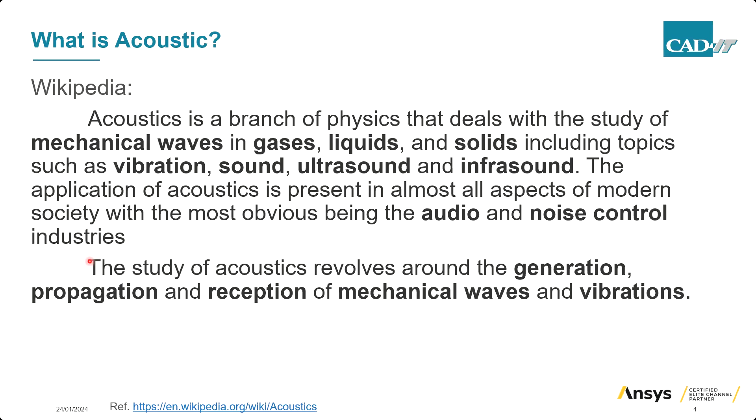Then if you take a look at sound itself, sound is the pressure disturbance that human ears can hear. We know that sound propagation is called acoustic, as we mentioned earlier. In this case, the sound wave will travel from the speaker to our ears.

The sound wave in this case is what we call a longitudinal wave. How does it propagate? If it is in solid, it's molecular vibration. But if it is in fluid mediums, it's because molecules exchange momentum, meaning they move ahead together.

In the propagation of the sound wave, momentum exchanges between fluid molecules, and this variation is known as pressure. It means that if we know pressure variation or deviation, then we know how sound travels from place to place, I would say that way.

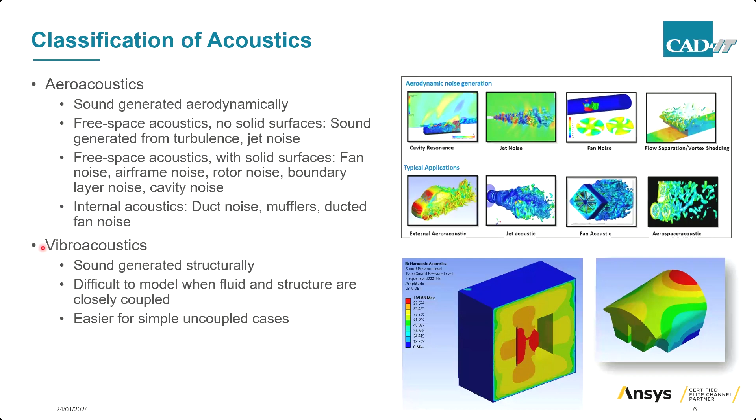Let's move on to sound pressure, or sound. The sound pressure is the local pressure that deviates from the ambient, atmospheric pressure, caused by sound wave. This means that when the sound wave propagates, it makes the pressure deviate. As I mentioned, momentum has been exchanged between molecules, and in this case we can use CFD simulation to solve the wave equation.

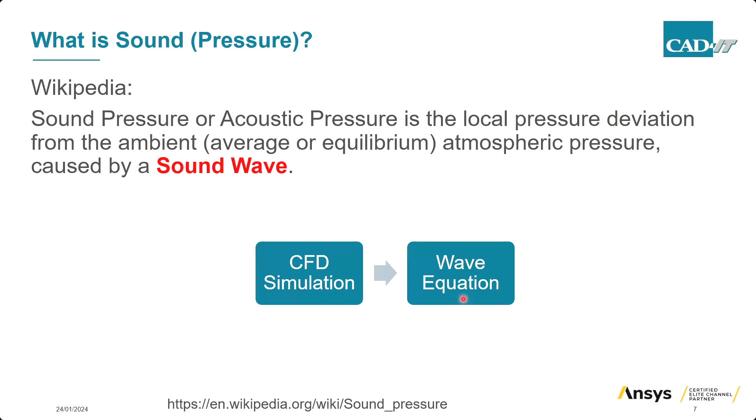Let's talk about CFD a bit, so you understand what it is. Because of aeroacoustics, we have what we call Computational Aeroacoustics, or CAA method, inside our solver as well. This method solves the Navier-Stokes equation, and the sound generation and propagation can be simulated by transient, compressible CFD, on a domain from sources to receivers, and we can monitor the pressure deviation using a receiver.

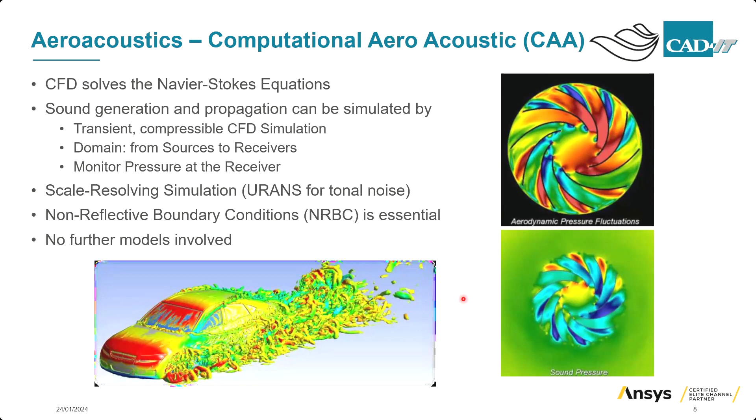If we go into detail on this CAA method, we solve equations like mass conservation and momentum conservation, and we also have a local speed of sound equation. When we manipulate the first and second equations, deducting starting from the first equation by the second, and also deducting by the local speed of sound, it ends up with this form where we have a wave equation, and also what we call the Lighthill tensor, which is like the convection term, turbulent term, and entropy term changes there. This is the Lighthill equation from 1952. This is how our Ansys CAA solver works inside Ansys Fluent.

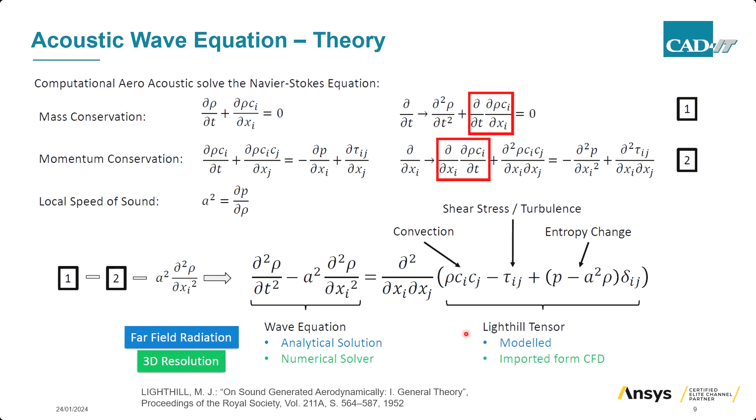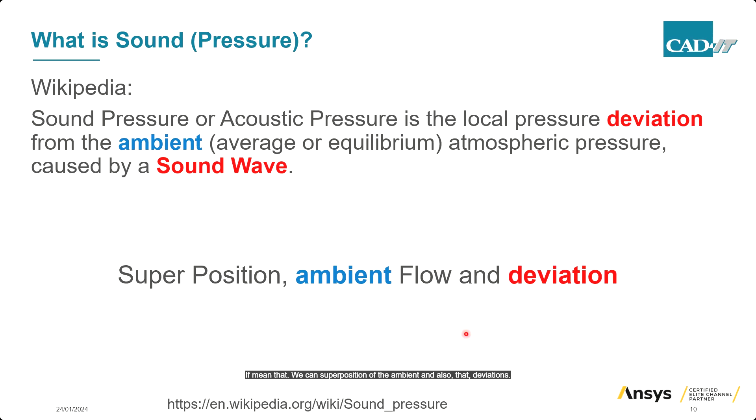If we move on a bit, let's take a look at what is the meaning behind sound pressure or acoustic pressure. You can see that we have pressure deviation and ambient pressure. It means that we can do a superposition of the ambient and the deviations.

When we take a look at the linear acoustic wave equation from the mechanical solver, it has been divided into two equations or two types. First is when we have no flow or no mean flow, then it ends up like this. Also, if there is no friction, v equal to 0, then we can have a wave equation for velocity potentials. And for this one, we can have what we call finite element discretization, because we can have pressure boundary conditions and also wall velocity conditions. In this case, we can solve this to get what we call a waveform as well.

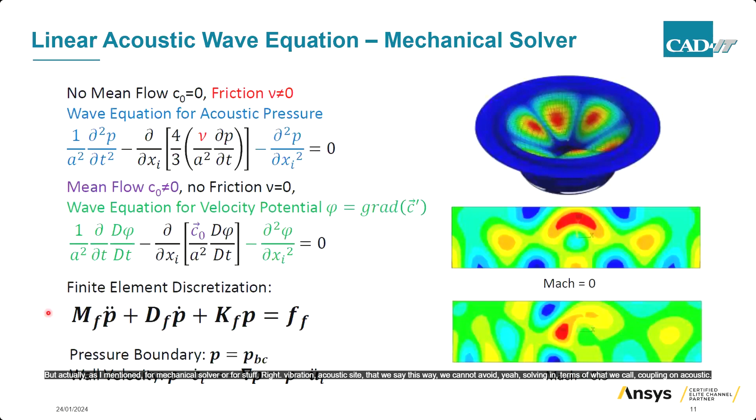But actually, as I mentioned, for the mechanical solver, or for the structure side, or vibroacoustic side, I will say this way: we cannot avoid solving in terms of structure coupling on the acoustic waveform. From the structural dynamic equation, the fluid will act as the external force on this structural dynamic equation. And if you have a fluid equation, the structure acceleration will be one of the terms in the fluid equation this way.

And if we couple both of them together, it ends up like this, because we would like to solve this in the coupled way. As I mentioned, the structural acceleration is acting on the fluid equation, and also the fluid pressure is also acting on the structural equation. This means it's already coupled together.

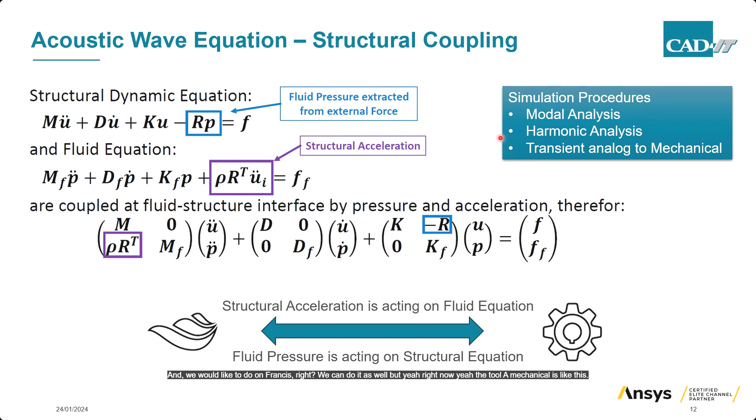How can we conduct this kind of simulation? We will use what we call harmonic analysis, and we also need to run modal analysis to get the waveform. And if we would like to do transients, we can do it as well. But right now, the tool inside Ansys Mechanical is like this: we can use what we call modal acoustic, and we can use what we call harmonic acoustics, for coupled and decoupled analysis of the acoustic analysis in Ansys Mechanical.

If we take a look at the interest of pressure distribution in fluid, particle velocity, sound pressure level, and also the scattering, diffraction, transmission and radiation of acoustics in Ansys Mechanical, this can be done and can be probed or plotted inside Ansys Mechanical using harmonic acoustic. I will go into detail on what is modal acoustic and also what is harmonic acoustic. But before that...

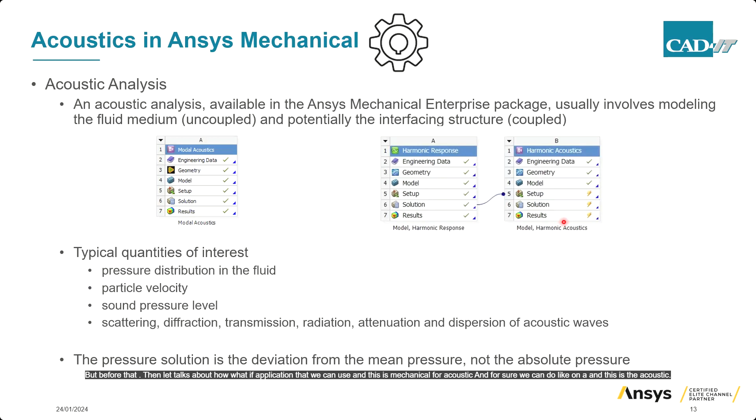Let's talk about what applications we can use Ansys Mechanical for in acoustic analysis. We can do sonar analysis, the acoustic counterpart of a radar. We can also do room acoustics and concert hall analysis, checking sound pressure level at each location. We can do noise minimization, noise cancellation, and underwater acoustic analysis. We can also simulate to help design speakers, acoustic filters and mufflers.

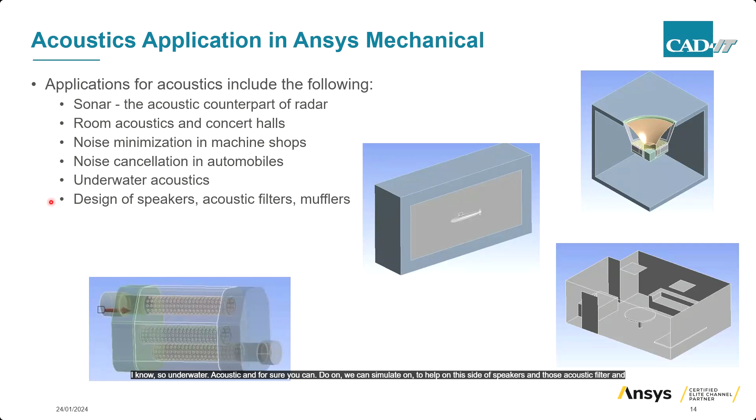When we talk about acoustics, let's understand what variables we should take a look at. For sure, pressure, because acoustic or sound pressure is a deviation of the pressure, velocity, temperature and also the density of the medium, and we need to take account of it.

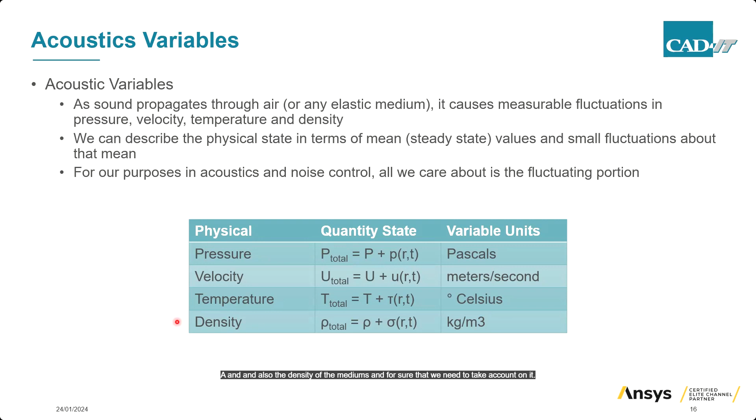For those who may not really be familiar with sound level, let's discuss this a bit. How can we measure sound? Actually, sound is measured using a decibel scale. What is a decibel scale? We need to understand this first.

Our human hearing range of pressure would be from 0.00002 Pascal to 20 Pascal, and the frequency ranges from 20 Hertz to 20,000 Hertz. In this case we need to convert this pressure level to be easily understood by using logarithmic sound power.

In this case, it's been like 3 decibels. This is the thing. Actually the decibel scale is applied as a ratio of sound pressure or sound power to a reference value. It means we should have a reference value first, and then it's just calculated based on the reference value. For the sound pressure, it is 20 log base 10 of the ratio. The factor of 20 comes because sound power is proportional to the square of the sound pressure ratio.

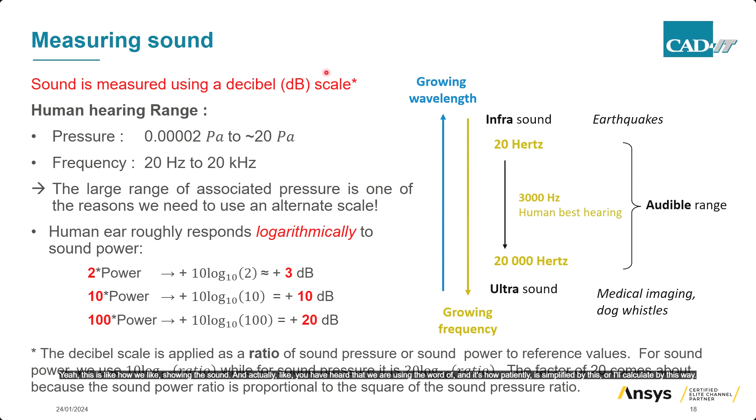This is how we measure sound. You have heard the term sound pressure level, and the sound pressure level is defined or calculated this way - it's a ratio of pressure RMS divided by pressure reference, which gives the sound pressure level.

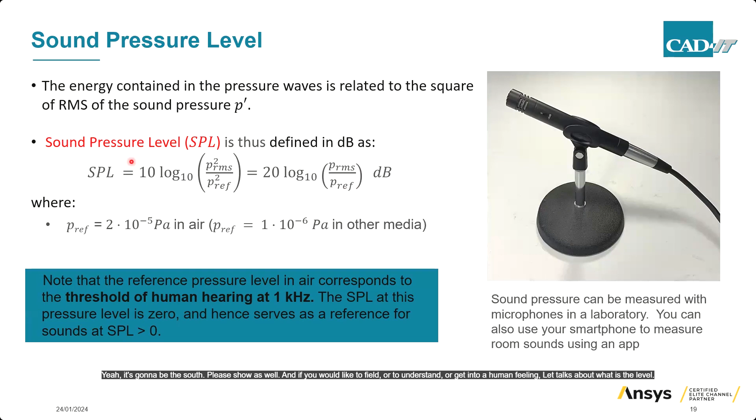If you would like to understand more or relate it to human feeling, let's talk about the sound pressure level of some situations. Like a recording room, a really quiet place, would be around 20 decibels, up to 140 decibels for a jet takeoff. But in a noisy place where we normally fall into, it would be like 70 to 80 decibels. If you read the article, you'll know that more than 80 decibels will hurt or affect your health conditions.

It means our daily life would fall into not more than 80 decibels. This is why sound pressure level is important to us, and why we need to measure it, or why we need to design or reduce the sound pressure level. This is one of the reasons behind it.

Let's talk about frequency weighting a bit, because when you read an article you'll see that sound pressure level has a weighting called A-weighting. What is the A-weighting? Actually, the A-weighting is the frequency weighting used to make the sound pressure level match our ear response, I would say.

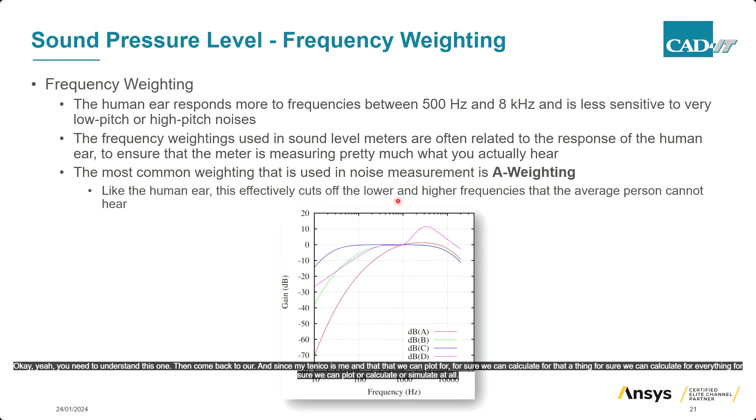Then come back to our Ansys mechanical. It means that we can plot sound pressure level for sure. We can calculate A weighting for sure. We can plot, calculate, or simulate acoustic pressure for sure.

And inside Ansys mechanical, it is divided into two types of calculation. First, what we call modal acoustic. Second, harmonic acoustic.

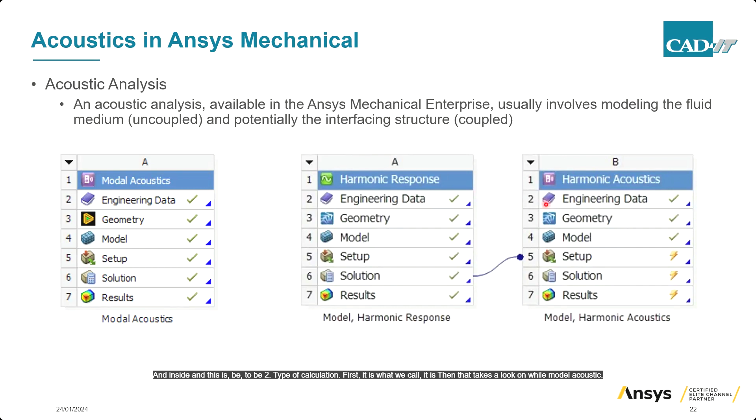Let's take a look at modal acoustic a bit. Actually, modal acoustic is to determine the frequency and standing wave pattern within the structure. It can be within the structure or within the cavity domain or the fluid domain, because in this case we need to model both the mechanical structure domain and also the fluid domain or acoustic medium domain.

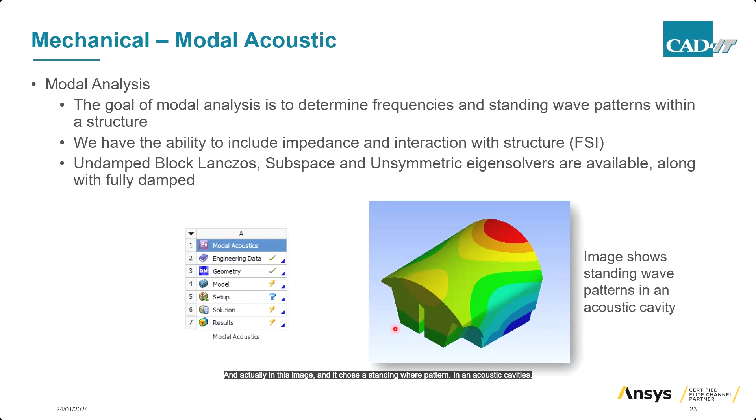Then we have ability to include impedance and also the interaction between fluid as well. The solver available includes undamped, Block Lanczos, subspace, and unsymmetric eigen solver. Also a fully damped solver is available in this case. In this image, it shows a standing wave pattern in an acoustic cavity or acoustic domain.

Let me quickly show you modal acoustic for this case. Acoustic mode. Give me a second, we need to... okay, what does it look like? First of all, what you need is this one.

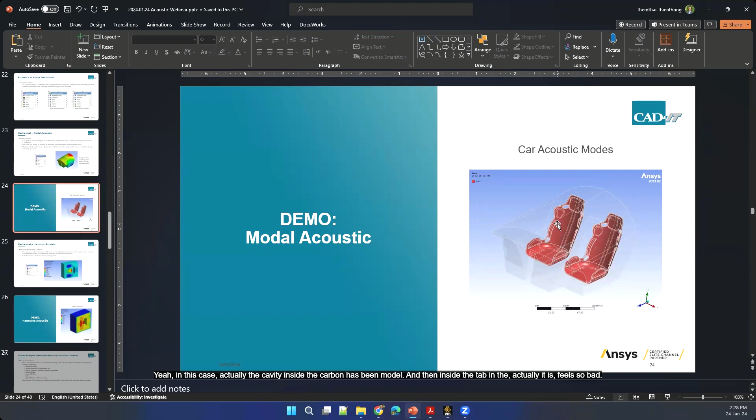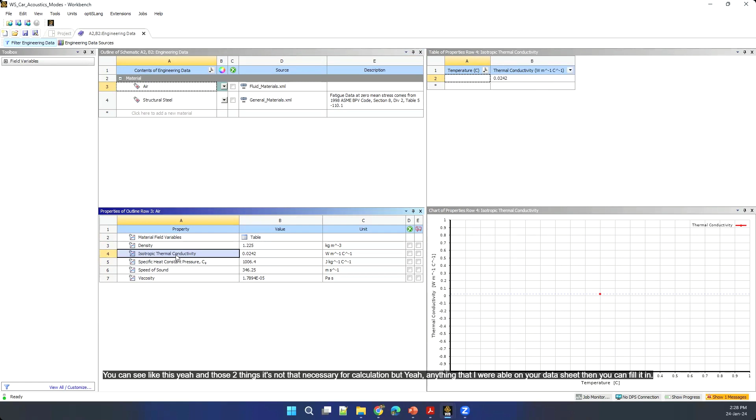Material properties - we have air property. Let me go back to this a bit. In this case, the cavity inside the cabin has been modeled, and inside the cabin it is air, a field of air. For the material, we need to define it as air, and we need density, speed of sound, and viscosity. Those two things are not that necessary for calculation, but anything available on your data sheet, you can fill it in.

Then you just draw everything. I won't really draw and show you, but I will show you what is inside the geometry preparation and domain. Give me a while, it's going to take a while to start Ansys Mechanical.

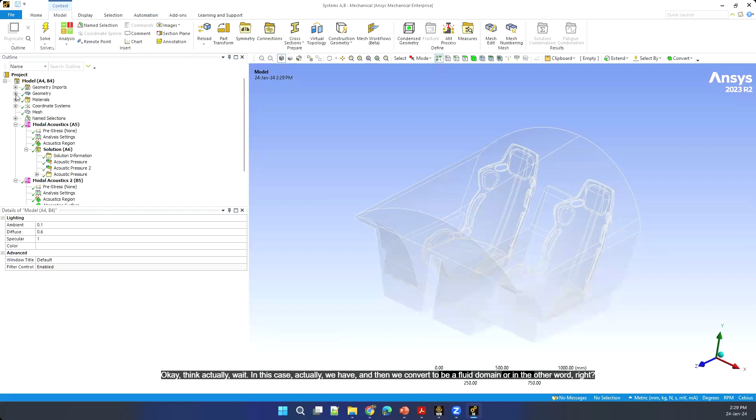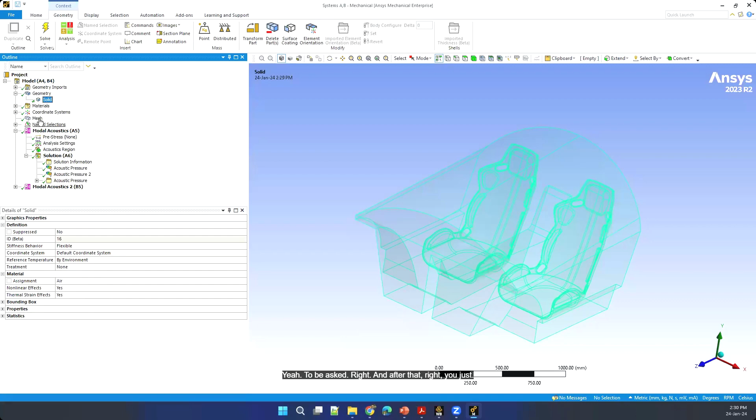In this case, we have drawn the seat itself, and then we convert it to be a fluid domain, or in other words, we can call it cavity or acoustic cavity domain. In this case, I just model this cavity and define the material here to be air, and after that we just mesh it as normal.

We need to define, for modal acoustic, we need to add this one. You can see we have physics regions, and because we only have one body, all bodies will be acoustic domain, as you can see.

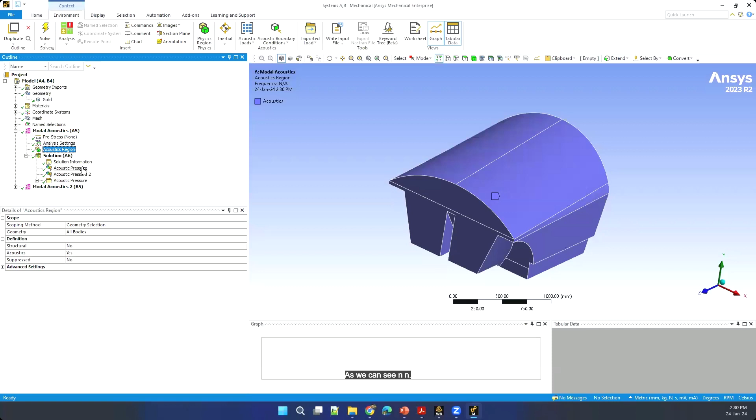After that, in this case it's not that much. Then we can have what we call a result of frequency and also standing wave in each mode. We can have various modes here - actually I can add all the modes.

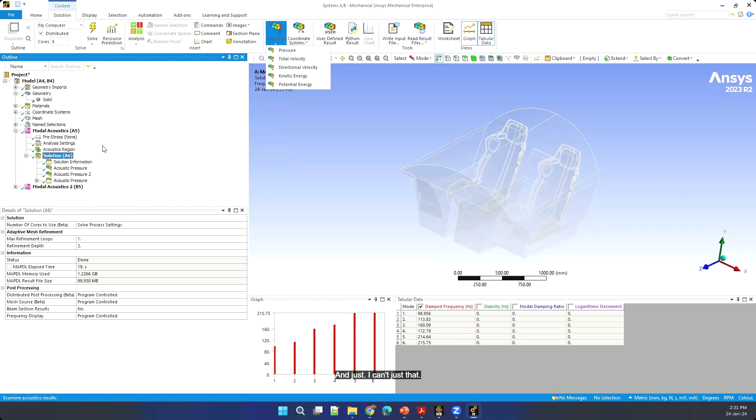No sorry, it should be acoustic pressure, not this one. I can just add acoustic pressure, mode number 3, and then we can have a different mode of standing wave, and each mode will contain a different frequency.

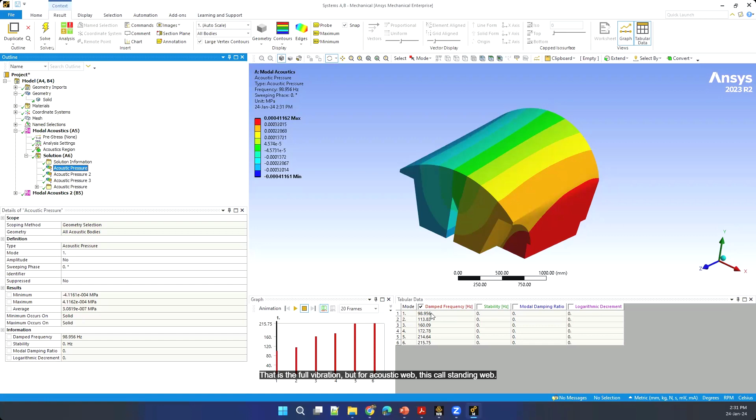If you compare to a vibration study, in this step what we call it is eigenvalue solving for natural frequency - it contains both frequency and mode shape. That is for vibration, but for acoustic wave it is called a standing wave pattern, and also frequencies. You can see that is approximately 100 hertz.

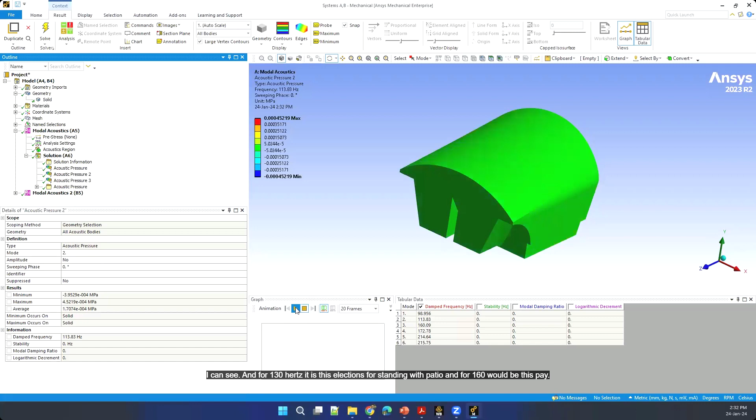The wave pattern will be this way, you can see it can be this way. And for 113 Hertz, it is this direction for the standing wave pattern. And for 160 it would be this way from the center. It's just the way to calculate what we call a standing wave pattern.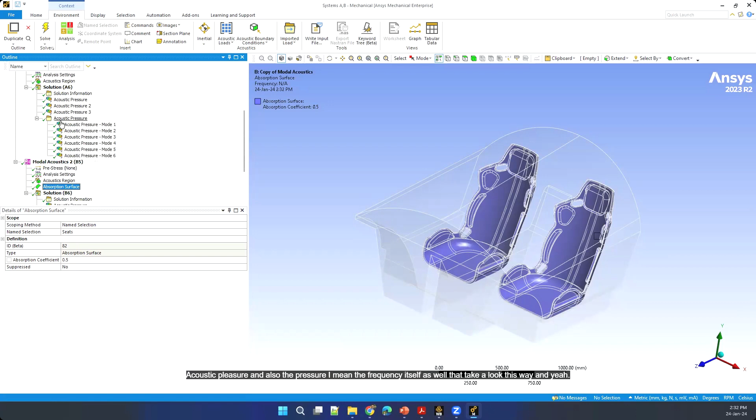If we have a bit of what we call only on the cavity - actually in the second case here, I have what we call an absorption surface, where we have absorption coefficient at 0.5. Then we can have different modes of acoustic pressure and also the frequency itself as well. Let's take a look this way.

It is from without absorption layer. Let me show you - this is from, no sorry, should be this one, mode 1. This one should be mode 1 here.

You can see that it is a bit different from the frequency itself. Let me check whether it's about the same. I think the pattern is about the same, but the frequency itself is a bit different for the first mode. If you'd like to see what mode has a different one, then we can just compare it.

Let me pull up the chart. It's quite a lot of things. Give me a while, I need to filter only the frequency, then we can see it clearly from the table.

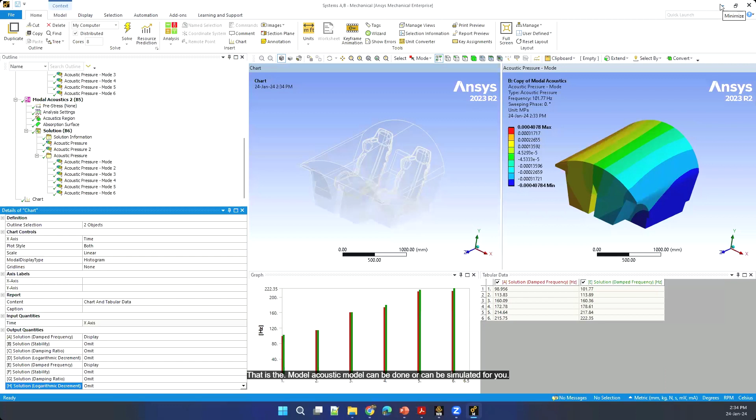So you can see that when we add the absorption surface into it, there's a slightly different frequency on mode 1, 4, 5, and 6. It means that this absorption surface directly impacts modes 1, 4, 5, 6 of the standing wave pattern. That's the modal, the acoustic model that can be simulated for you.

Okay, that's the thing for this model. Next, I will talk about what we call harmonic acoustic. Let's go back to the slide a bit.

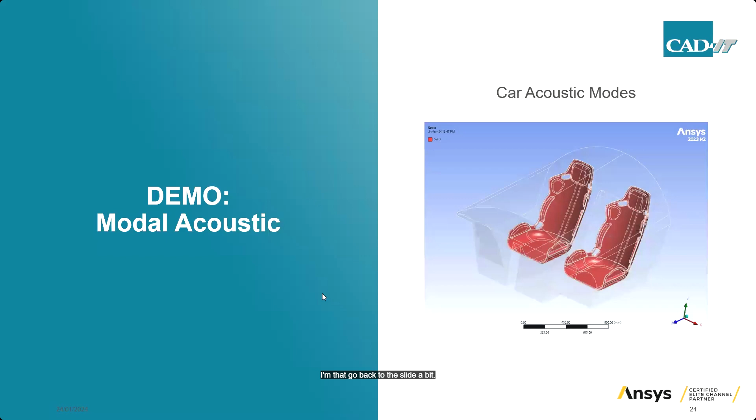For harmonic response analysis, we calculate the response of the system as a function of frequency based on the volumetric flow rate or pressure excitations. We can see wave propagation and the sound pressure at each location. We can also plot or check sound pressure level at a particular location, and see what we call a far field plot of the sound pressure level.

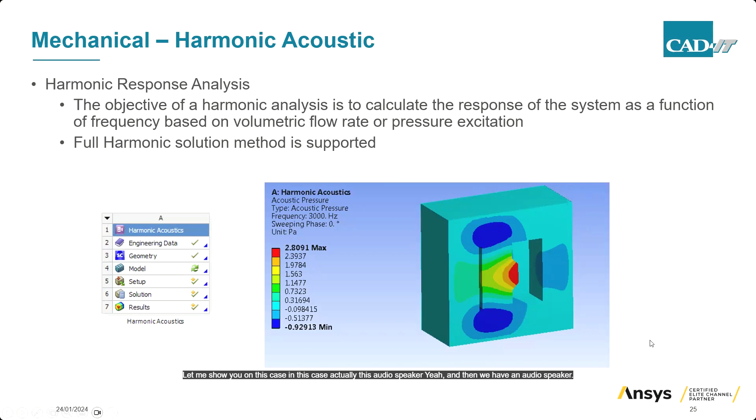Let me show you this case. Here we have an audio speaker. Let me show you, maybe the fastest way, just to demonstrate what we can do with harmonic analysis, harmonic acoustic analysis.

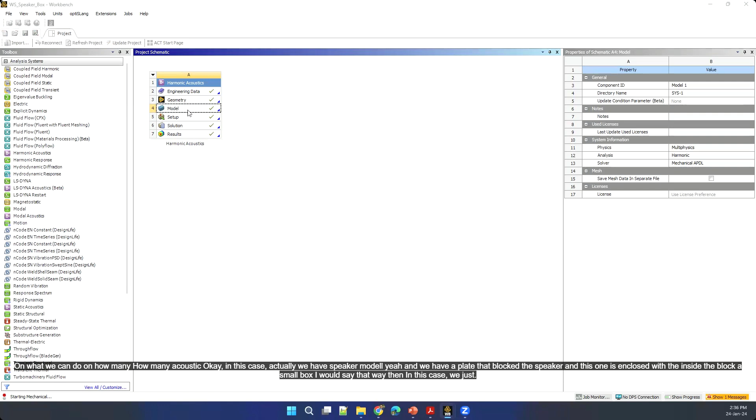In this case, we have a speaker model here, and a plate that blocks the speaker, enclosed inside a small box, I would say.

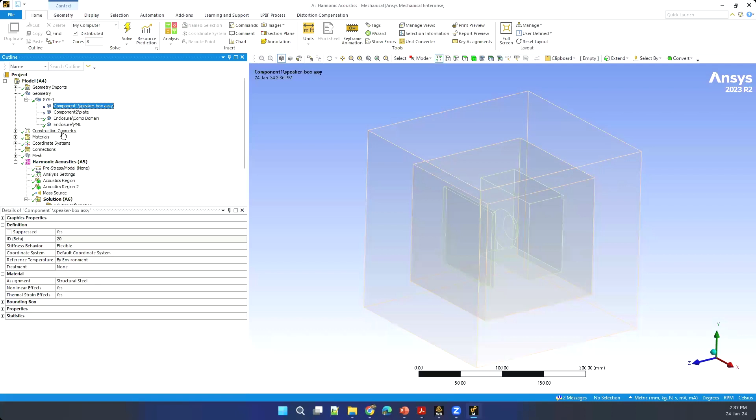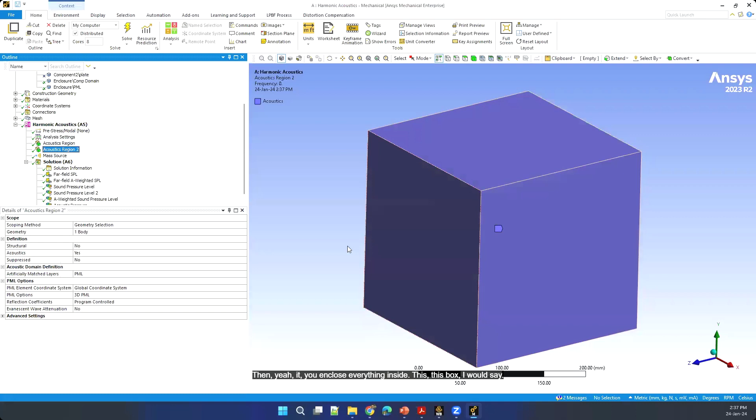For sure we need to add two acoustic domains. The first one, the second one, because we have what we call a PML layer here, which will enclose everything inside this box.

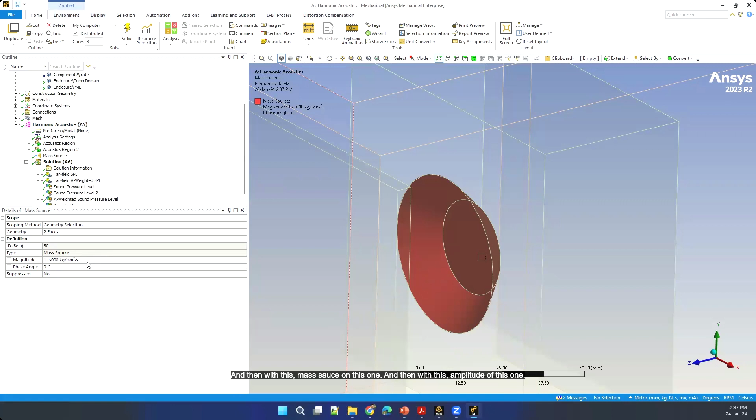In this case, I add what we call a vibration source, or mass source, on this one, with this magnitude. After we set it, we define this speaker as a source of the sound, of the acoustic.

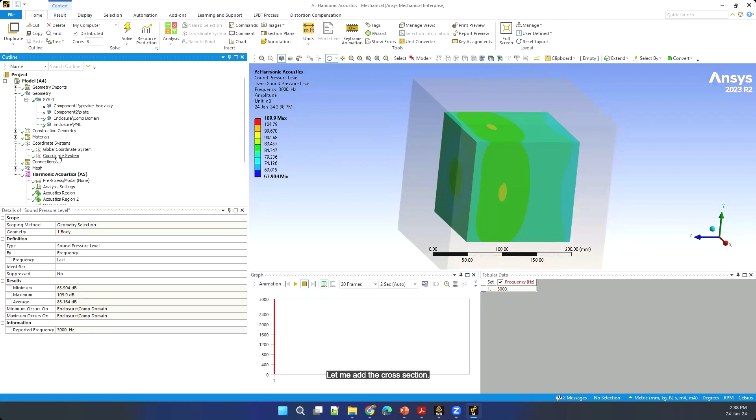After we solve this case, here's what we can plot. Let me show you this one, a sound pressure level. It's quite hard to look at, right? Let me add a cross section, a cross-section plane.

Okay, and then my section plane. I think I've created many times. I think this way. Okay, it's okay, just plot it, it's okay. Yeah, we can see it now.

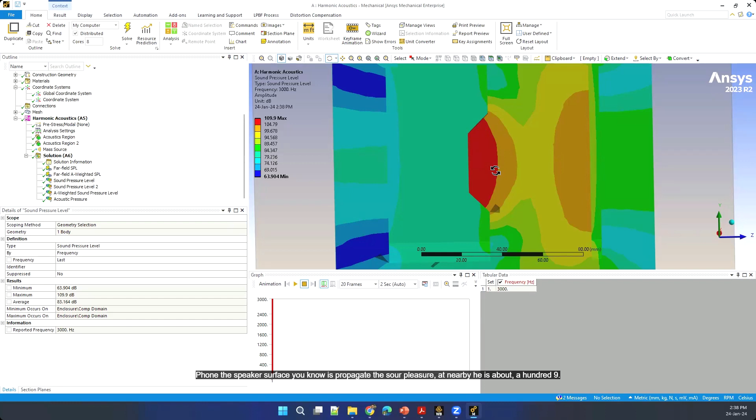From the speaker surface here, the sound pressure level propagates. Nearby here it's about 109 decibels, and it reflects on the PML surface as well. This is the contour plot of sound pressure level. I've also plotted it on a cutting plane for easier viewing.

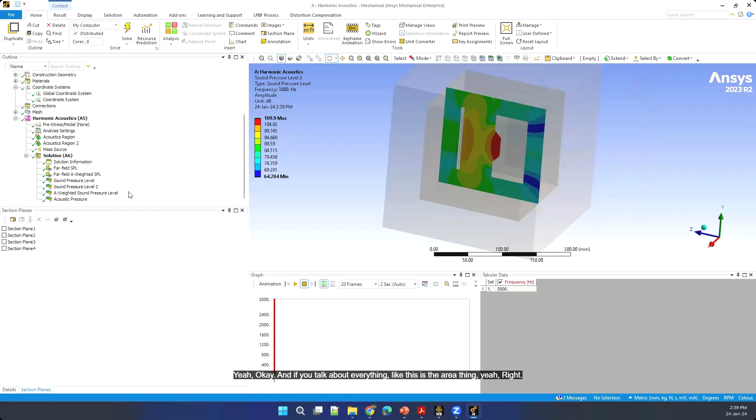And if we talk about A rating, this is the A rating, or dBA, decibel A. This is what we call A rating.

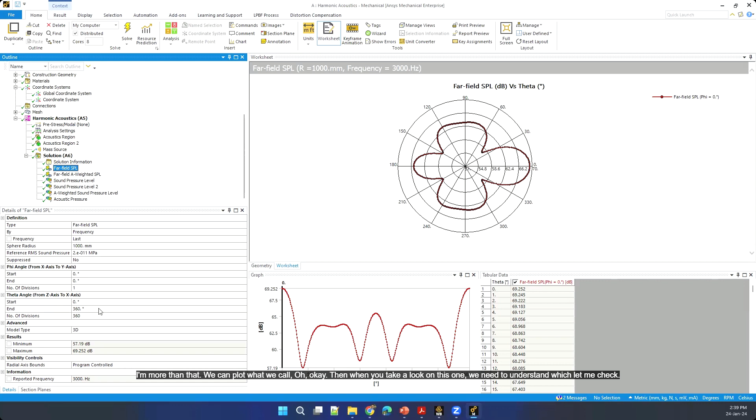More than that, we can plot what we call far field. When you take a look at this one, we need to understand which... let me check, okay, I should rotate this way. Then we have the proper location. Let me plot this, let me use this one.

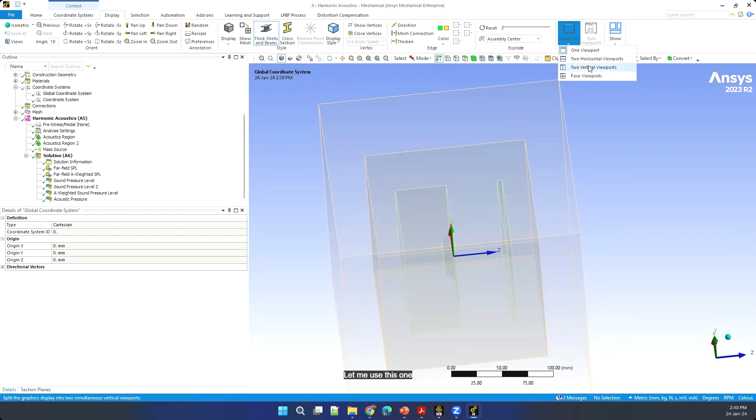On the top will be sound pressure level, and on the bottom I plot this far field. This is at the front of the speaker surface. You can see that in front we get a higher sound pressure level. And if this is the A rating, then the distance and also the angle like that, this is what we call a far field plot.

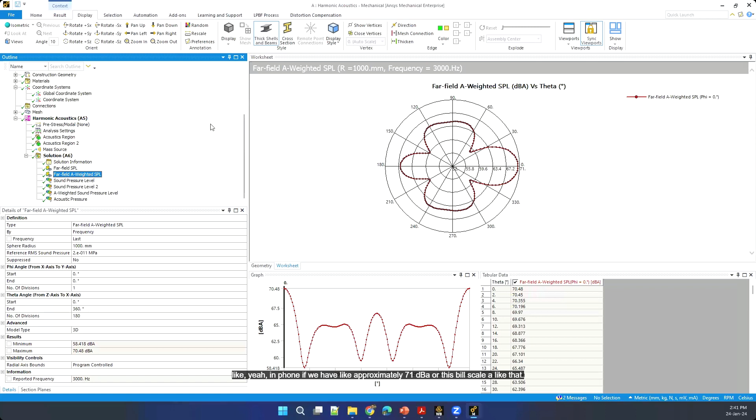And the far field plot, we can define where our sensor or monitoring surface is, as a sphere at 1 meter radius. It means if you stay away from the speaker for 1 meter, in front you will get approximately 71 dBA, decibel scale A.

Rating A, yeah, this is what we can do inside Ansys Mechanical. You can plot a sound pressure level, you can plot acoustic pressure as well. This is like what we call harmonic acoustic.

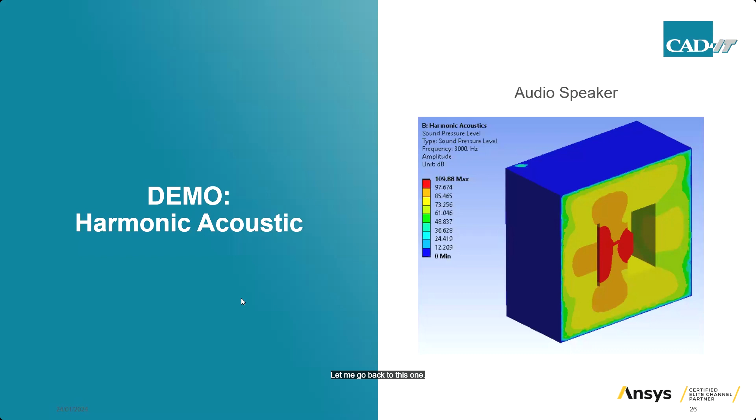Let me go back to this one and talk about this a bit. Because our test is not like, because we would like to hear the sound that came from our simulation as well, I would like to introduce to you what we call Ansys Sound, where you can listen to the sound pressure level that you have simulated. Right now we have support on Fluent, Mechanical, and Motion, and also LS-Dyna.

It means that if you can plot or extract what we call FFT data or the waterfall diagram, it looks like this from Ansys Mechanical or Ansys Fluent for FFT data, then you can import it into Sound, and you can listen to the sound that you have just simulated with. Then this is the case study that I have.

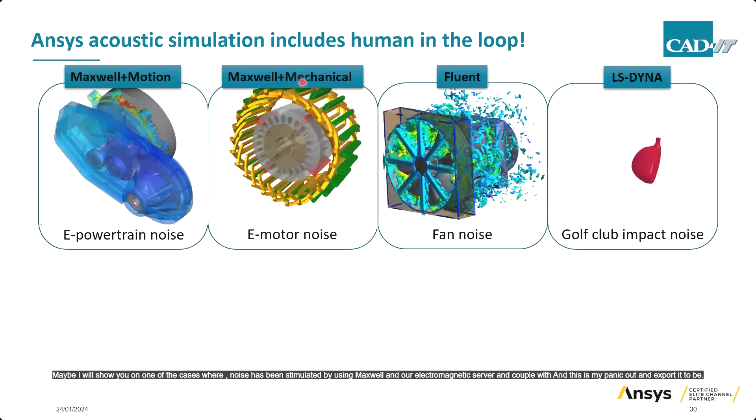Actually for today we have a quite short time period. I will show you one of the cases where e-motor noise has been simulated by using Maxwell, our electromagnetic solver, coupled with Ansys Mechanical, and exported it to be a waterfall diagram.

Right before that, let me introduce you to Ansys Sound a bit on what the capability is. Ansys Sound can do what we call sound analysis, order extractions, noise source separations, and psychoacoustic calculation, where you can get even other indicators rather than only SPL or sound pressure level. We can also generate the sound from FFT data, from waterfall data, and you can use a mixer to design the sound, de-amplify or amplify it like that.

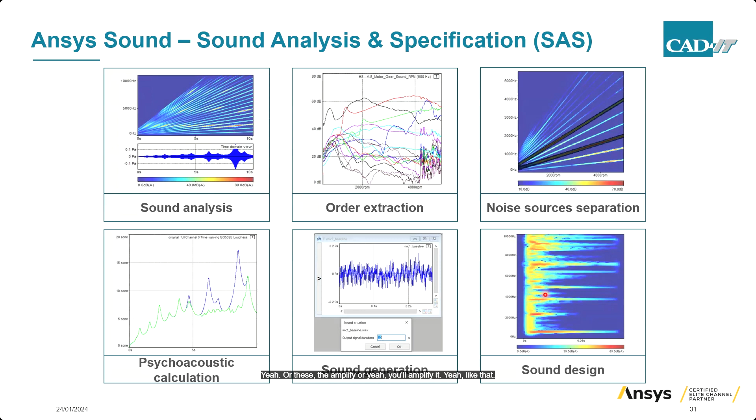Then what does sound analysis or order look like? Actually the original recording will look like this, it's like a mess up, I mean it is everything, right? But from this pattern we can separate it to be what we call engine sound and also wind and tire sound. Inside Ansys Sound you can separate this easily by using what we call tachometers, tachometric information models, and we can create a data set or separate it quite easily inside Ansys Sound.

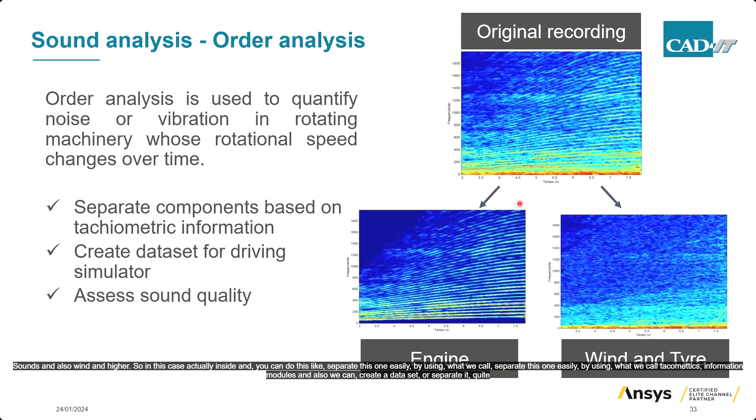For psychoacoustic, I'm not sure whether your sound system is good or not. Actually I'll play the sound of this one, let me do it again. It is like the sound of testing aerodynamics for the vehicle, and this is the record of aerodynamic noise of one model. Let me play it again.

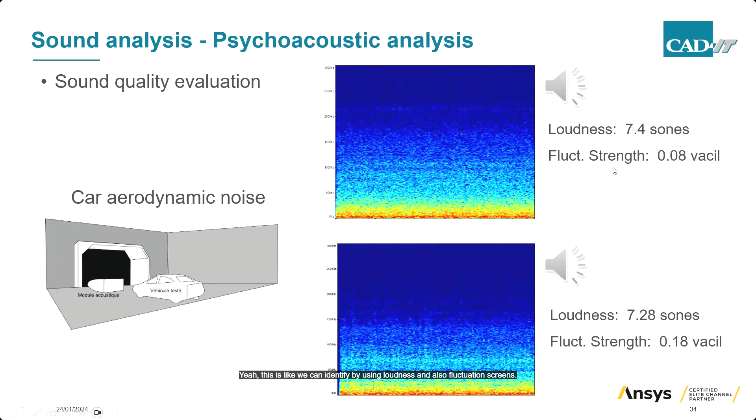But when you listen, actually from the record or the plot it seems to be about the same. But because we do have other indicators on psychoacoustic, we can analyze that these two types of design have different loudness and also fluctuation. This is how you can identify it, by using the loudness and also fluctuation strength. Not only fluctuation strength or loudness, we do have other indicators as well. This is just a snapshot of the psychoacoustic module inside Ansys Sound, actually we have more than this.

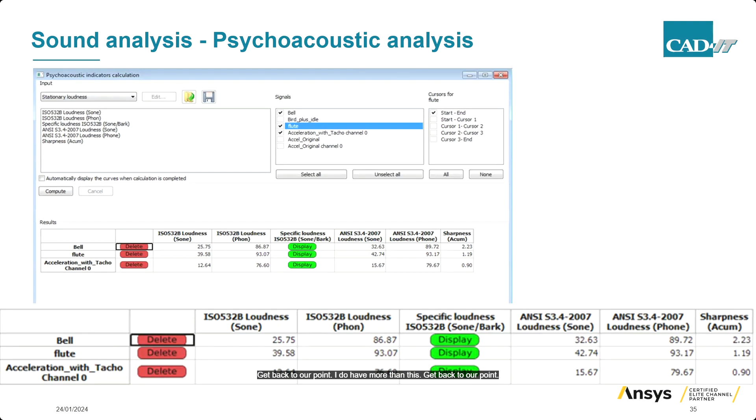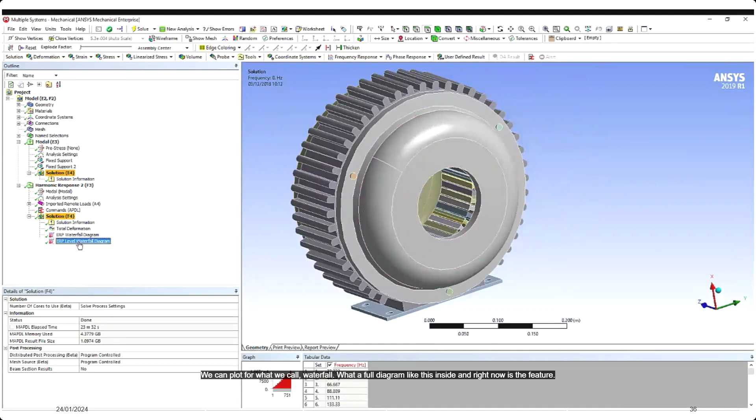Get back to our point, I do have a short demo as a video record here. When using Ansys Mechanical, we can see that we do have harmonic response there, and after we have done solving harmonic response, we can plot what we call the waterfall diagram or ERP level waterfall diagram like this. Right now this is a native feature already in Ansys Mechanical.

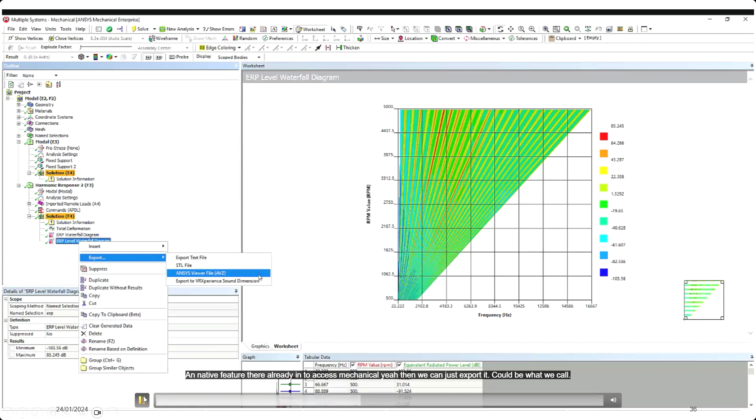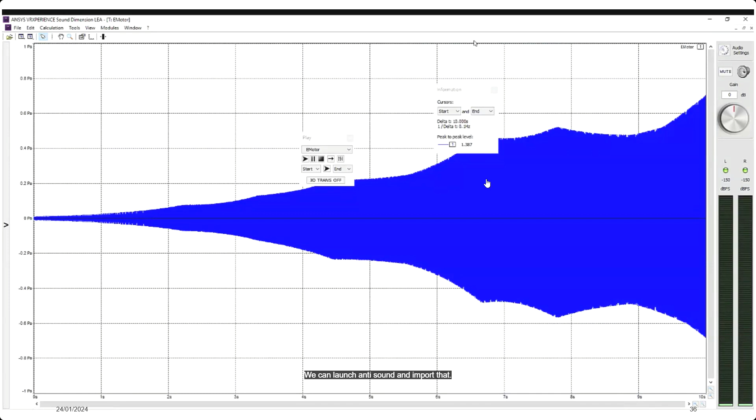Then we can just export it to be what we call XML data, and after that we can launch Ansys Sound and import that XML data in. Then we can get a waterfall, and we can play and listen to it. This is how we do it. Let me show whether I can access the add-on module.

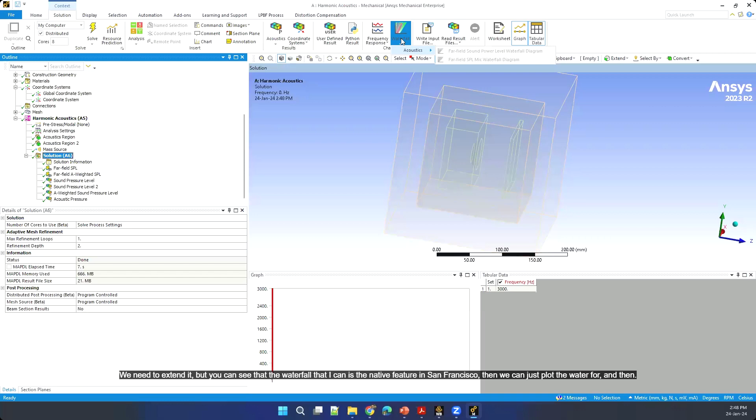Yeah, it's like the conditions right now. This one is not supported because in this case the waterfall cannot be ported as a waterfall—we need to extend it. But you can see that the waterfall diagram is a native feature in Ansys Mechanical, so you can just plot the waterfall diagram and have it imported to Ansys Sound.

Let's go back to the use case, let's go back to the presentation. I will give you the workflow on solving electromagnetic noise.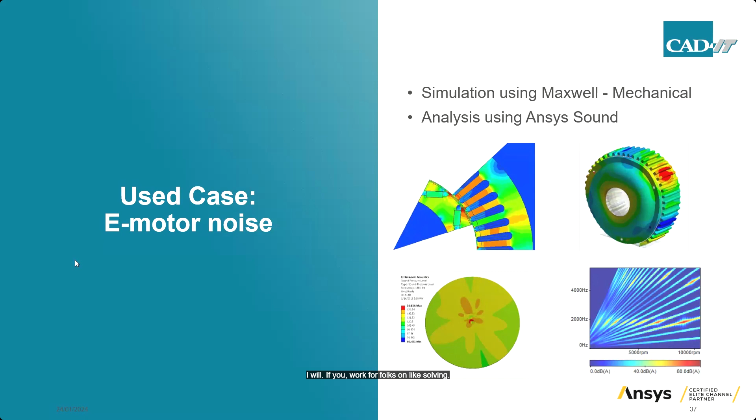This use case is aimed to analyze the sound of an electric motor based on Maxwell and Mechanical. We would like to visualize, shift and reshape the sound, and also compare between the original and modified signal using what we call psychoacoustic criteria.

In this case it has been done on Ansys Maxwell, our electromagnetic solver. We solve for electromagnetic force in transient analysis, then couple it with Ansys Mechanical structure in order to solve the response for each speed and RPM.

We would like to create what we call equivalent radiated power, or ERP. After that, we couple with vibroacoustics and calculate the sound pressure level with a frequency diagram on the waterfall diagram with multiple RPM as well. At the end we get this waterfall diagram and import it to Ansys Sound SAS.

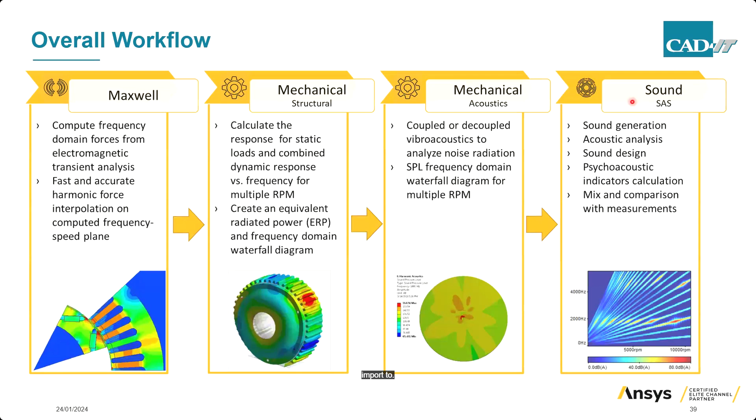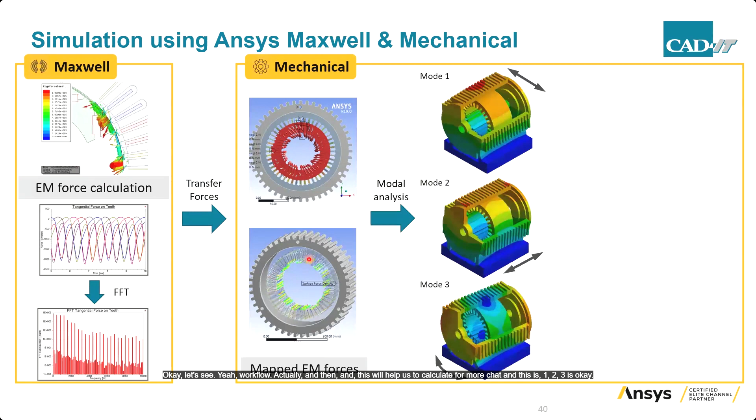Okay, let's see the workflow. Electromagnetic force is calculated, then transferred and mapped onto Ansys Mechanical. This helps us calculate mode shape analysis, or modal analysis—mode 1, 2, 3, that's okay.

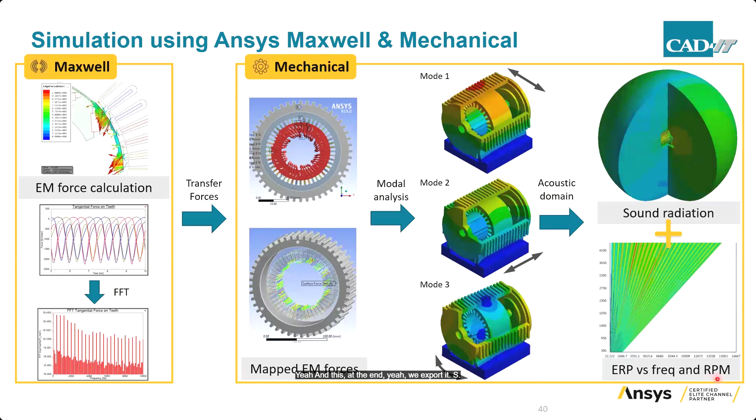After that, it's coupled with the acoustic domain, and then we calculate the sound radiated or sound propagation. In this case, we can have ERP versus frequency and RPM, and at the end we export it as XML files.

That waterfall diagram has been exported to XML files, and in this case the spectra data can be imported into Ansys Sound. After that, we can listen to it.

This is from the waterfall diagram, and we can convert it to a wave sound. And this whistling sound—I'm not sure whether you have heard of it or not. I can play it again.

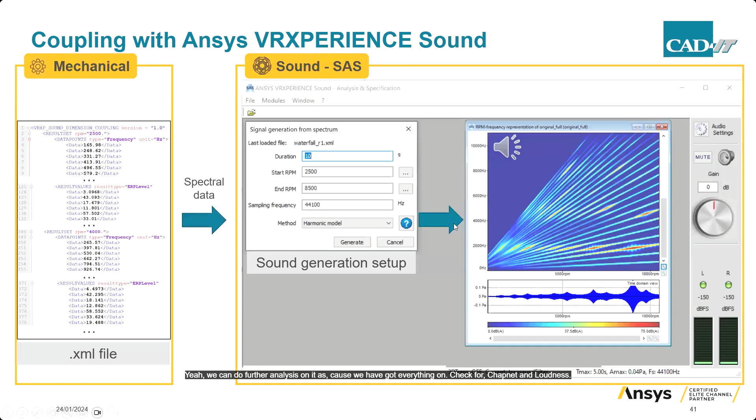We can do further analysis on it. Since we have everything in Ansys Sound, we can check for sharpness and loudness. Sharpness is the sensation of the sound being bright, usually with more high frequency content. Loudness is the perception of sound intensity.

We can have sharpness versus time, and also loudness versus time. If you take a look at the wave plot, you won't see the sharpness and loudness in this other perspective of sound quality analysis.

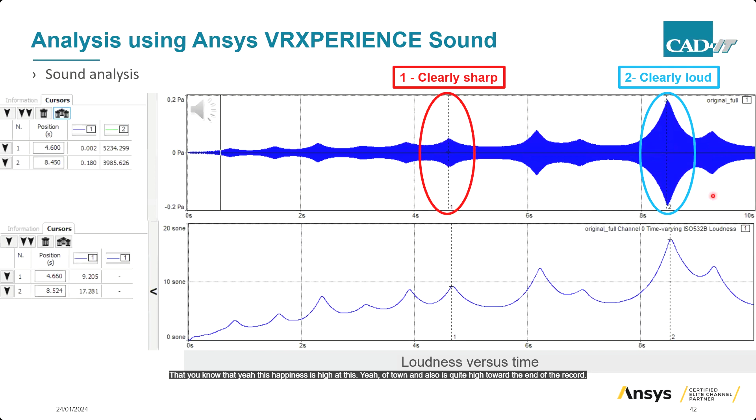But with Ansys Sound, you can see that the sharpness is high at this period of time, and the loudness is quite high towards the end of the record. I'll just put it this way.

If we go back to the waterfall diagram that we just imported into Ansys Sound, you can see here that it's quite red, which means it's a high level of sound pressure level.

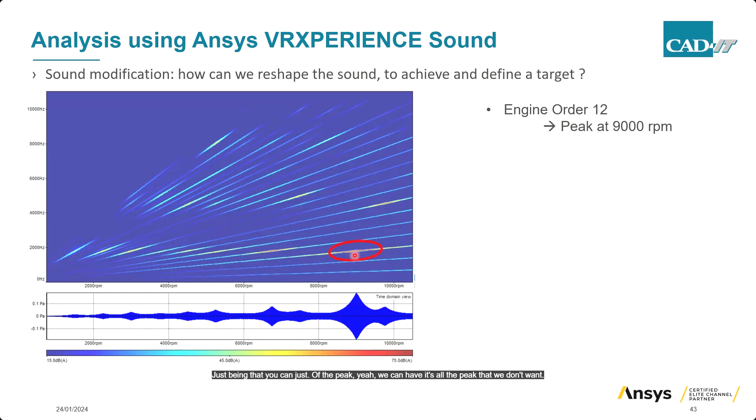Which means we can cut off the peak, the peak that we don't want. We can actually do this for all of them, but in this use case they just picked four of them and then de-amplify—meaning just turn it off, something like that.

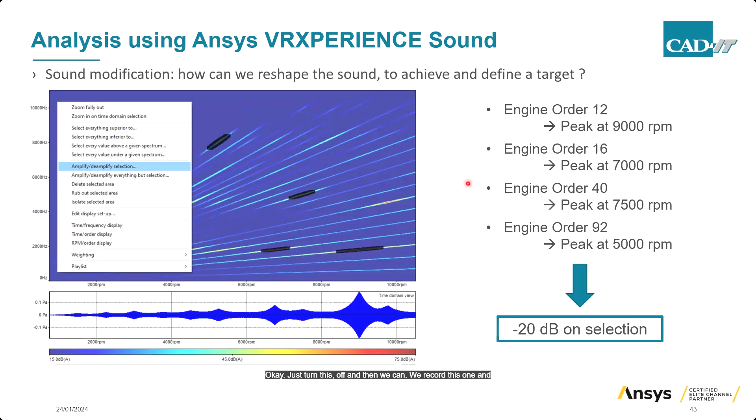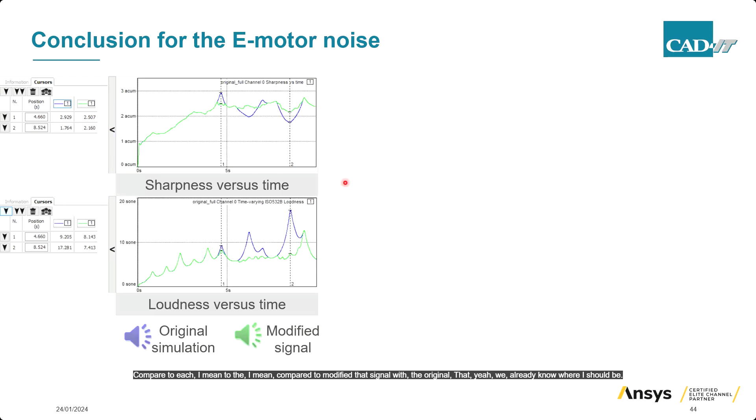Let me just turn this off, and then we can re-record this one and compare the modified signal with the original signal. From that, we already know where we should get rid of the higher loudness and sharpness.

With this psychoacoustic indicator, it helps categorize the sound quality as well, and the product design team can use this psychoacoustic criteria as the goal of optimization for better design. I'll put it this way.

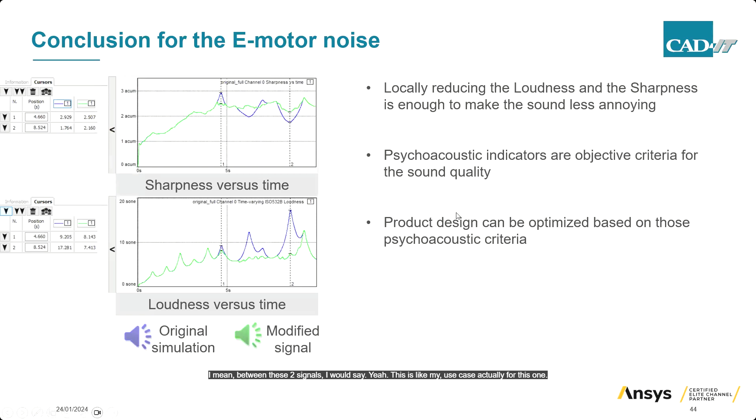If you would like to listen, you can play it. This is the original simulation sound, and this is the modified signal. You'll notice there is a big difference between these two signals. This is my use case for the Maxwell and Mechanical workflow.

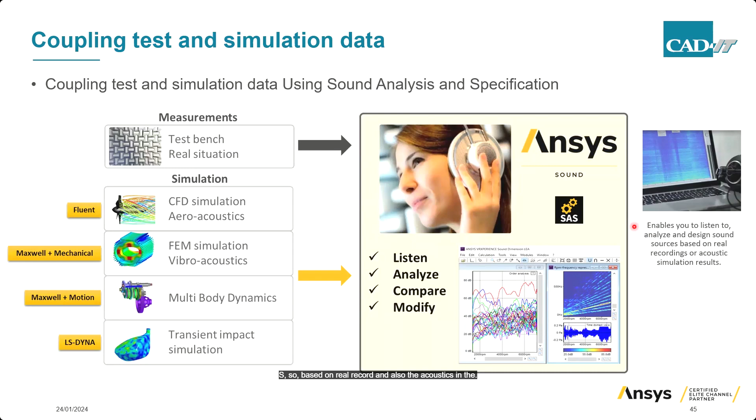Last slide of mine. I just would like to give you the whole idea or overall picture of our Ansys ecosystem for sound analysis. I have mentioned that aeroacoustic would be on Ansys Fluent.

Vibroacoustic would be on Ansys Mechanical. If you would like to listen to the simulated sound, acoustic level, or sound pressure level, you need Ansys Sound. Then at the end, most of us would like to have an optimized product, and the psychoacoustic indicator can be one of the criteria inside our optimization. In this case, we need Ansys optiSLang to be the engine driving everything and optimizing the product for you. Ansys optiSLang is the advanced tool for optimization and content optimization. That is the thing on my mind right now.